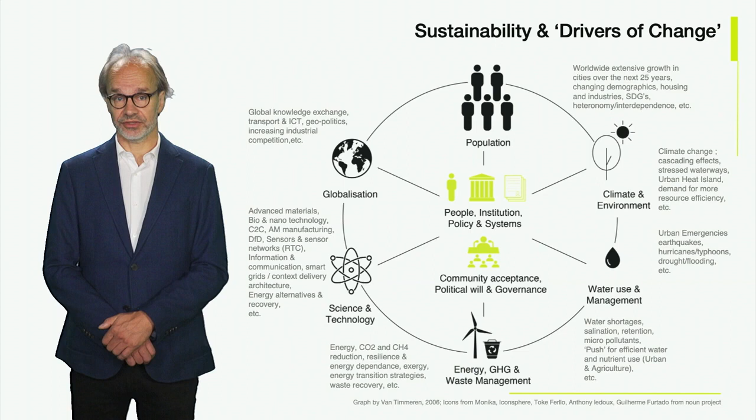There's a growing consensus that the world may be entering a period of scarcity, so it is more critical than ever to adopt a sustainable approach to development. In this complex setting of so many drivers of change, people, institutions, policies and systems are crucial starting points. An important step forward occurred in 2015 when the world embraced the 17 Sustainable Development Goals, or SDGs, which clarified that political will and community acceptance are essential for sustainable development.

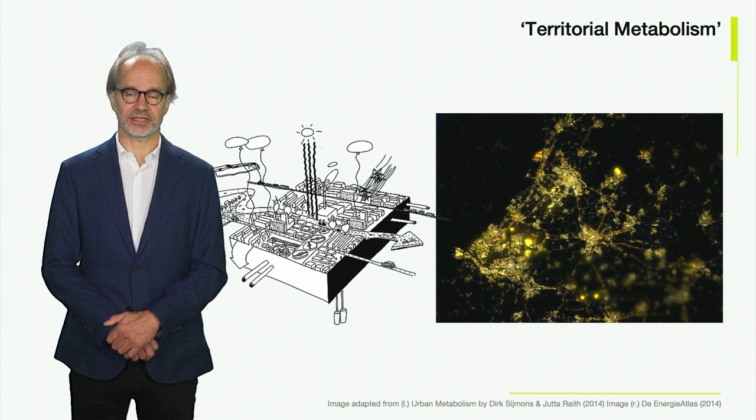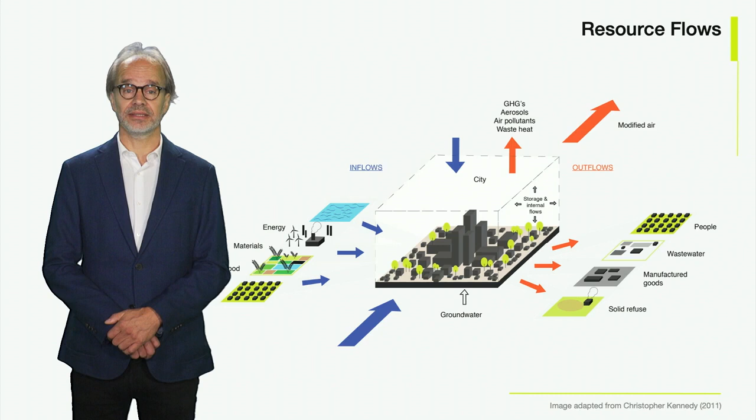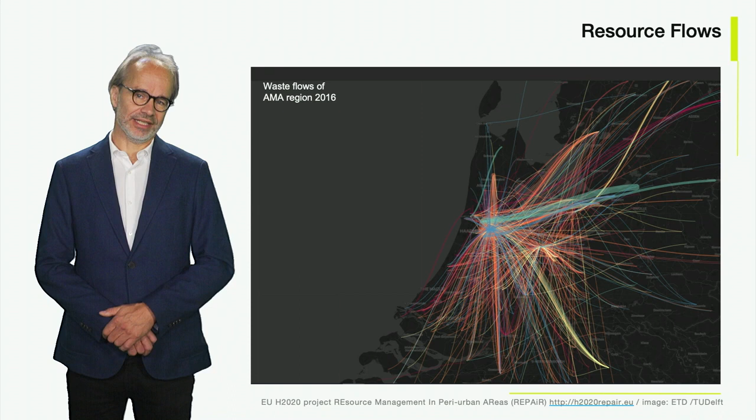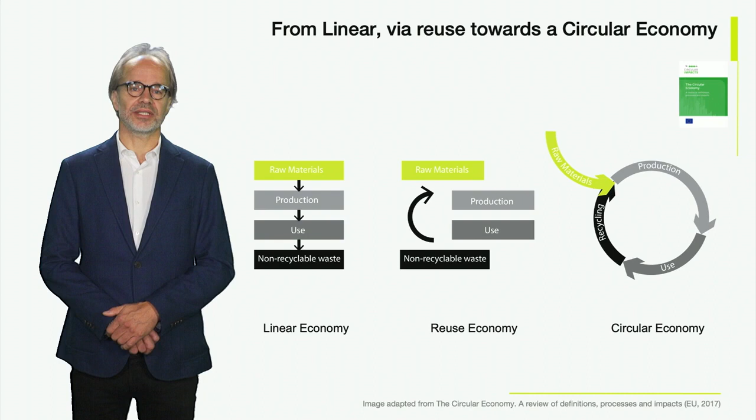One could actually use the analogy of the metabolism, a framework for modeling complex territorial systems, material and energy flows, as if the territory were an ecosystem. It helps us to study the dynamics of a territory in relation to scarcity, carrying capacity, and conservation of mass and energy. Now, as we have seen in the example of the Amsterdam metropolitan area shown before, our actual economy can be framed largely as linear. The prevalence of reuse within the economic models is increasing, but right now there is little that can truthfully be considered circular. So what distinguishes a linear economy from a circular one?

A linear economy converts natural resources into waste via production. Within this process, natural capital is removed from the environment, and by pollution or waste, the value of the natural resource is reduced. In a circular economy, however, there will be no loss of value, and the net effect on the environment will be zero or even positive. This is also called a regenerative overall effect.

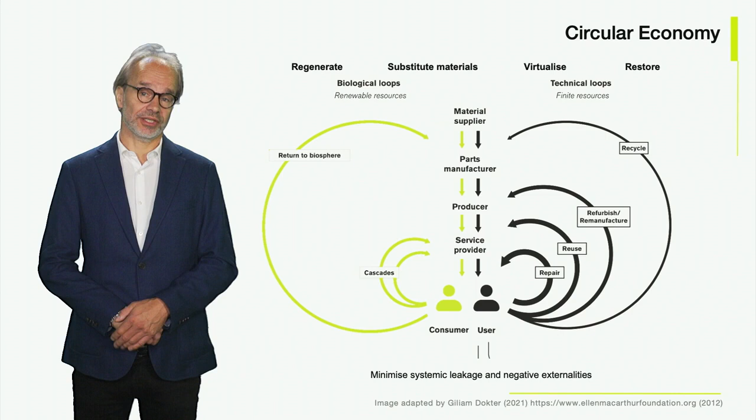In 2012, the Ellen MacArthur Foundation introduced the so-called butterfly scheme to explain a circular economy, with biological loops related to renewable resources and technical loops related to finite resources. The former achieves circularity through cascading, the latter through the so-called R-ladder approach. Concepts integral to the loops include regenerating or substituting materials, but also virtualizing material change and/or restoring all. This, of course, with the aim to minimize systemic leakage and negative externalities.

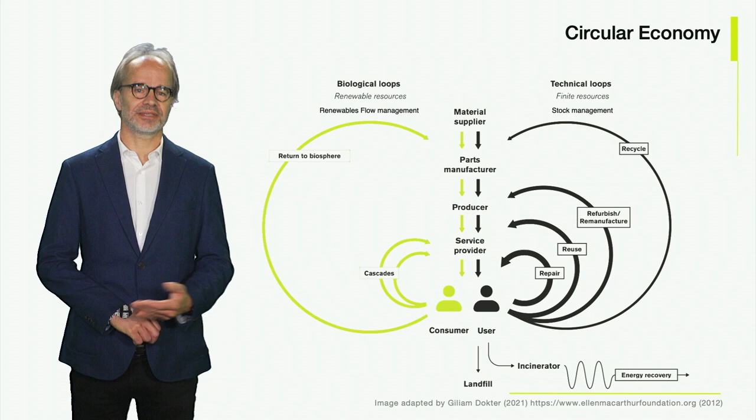Reality, unfortunately, teaches us that there's still landfill and waste that is incinerated, the so-called low-value recovery, in this case of energy. Overall, only about 9% of all global material resources at the moment are recycled annually. This is also referred to as the circularity gap.

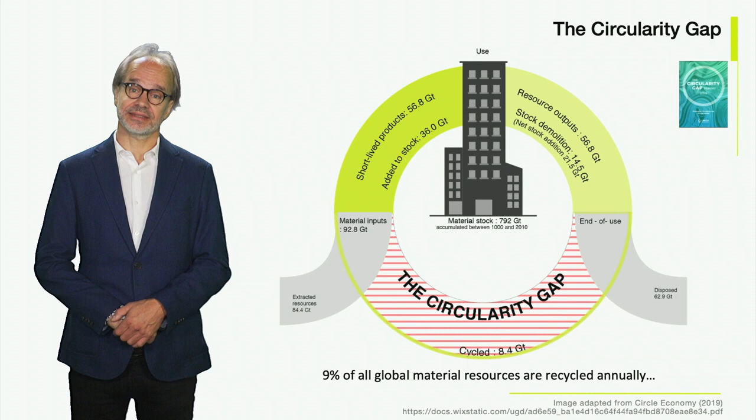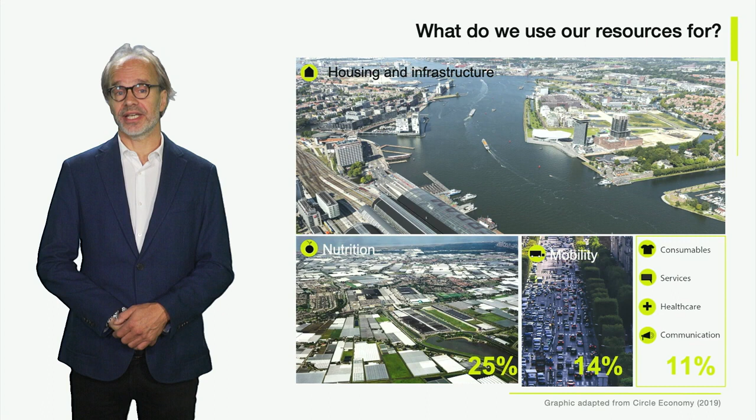In the previous example of the Amsterdam metropolitan area, the largest share of material resources and its use is associated with housing and infrastructure, followed by nutrition and mobility. This brings us to the need for systemic thinking and the inclusion of social equity.

For instance, look at these graphs. The first graph to the left shows environmental load related to energy resources, and the second includes materials in the scope, and a more nuanced image arises. Where we all thought the desired move from left to right in the left image tells a clear story, once adding special metals in the right, the overall assessment could be different. This is why circularity requires a systemic thinking approach.

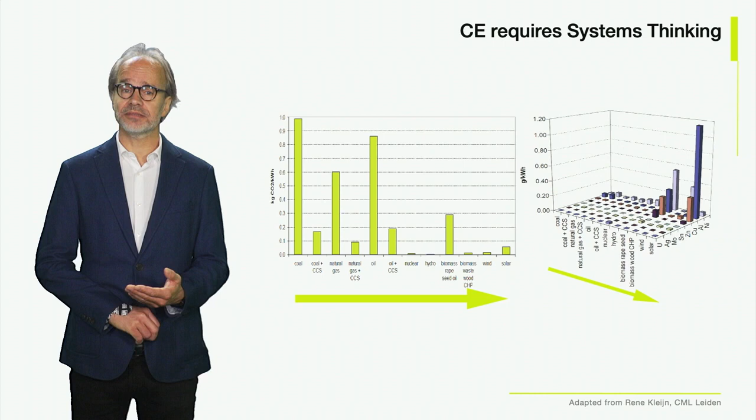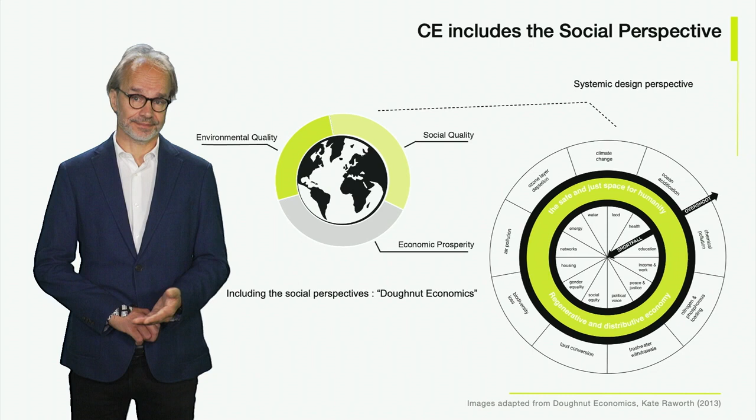And this means also the importance of including a social equity perspective, such as elaborated, for instance, in the concept of doughnut economics. If you apply this further to the field of spatial planning and development, it could be summarized as suggested by Metabolic as the 7 pillars of circularity.

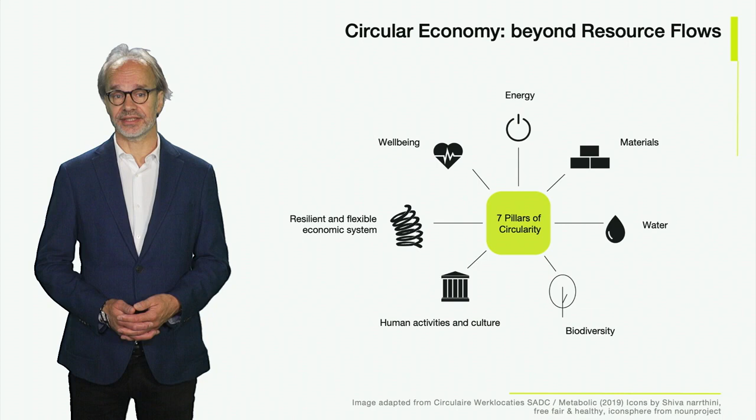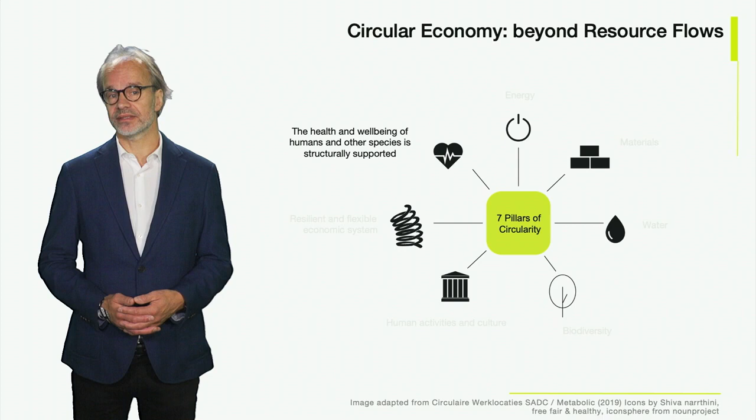Materials in the economy are cycled at continuous high value, water is extracted at a sustainable rate and resource recovery is maximized, biodiversity is structurally supported and enhanced, human society and culture are preserved, human activities generate value in measures beyond just financial, and the health and well-being of humans and other species is structurally supported. And all of this, of course, from the perspective of equity, resilience, and transparency.

This brings us to the final part of this video, related to circular strategies, value chains, and how the notion of multiscalarity and the regional scale is crucial.

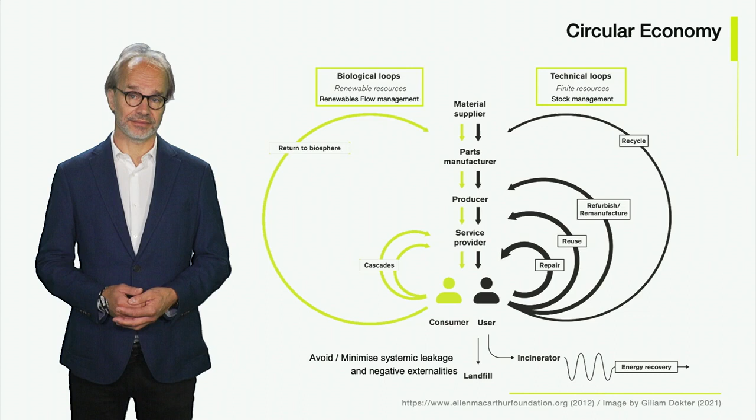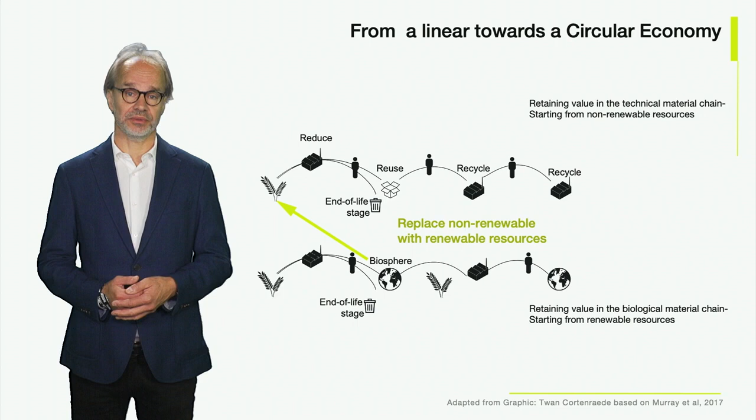Remember the 2 value chains in the circular economy butterfly scheme of the Ellen MacArthur Foundation? It comes down to either retaining value in the technical material chain, in the case of non-renewable resources, or in the case of renewable resources, retaining value in the biological material chain. However, the ultimate goal should always be to try replacing non-renewable with renewable resources, as shown in this overview of both value chains.

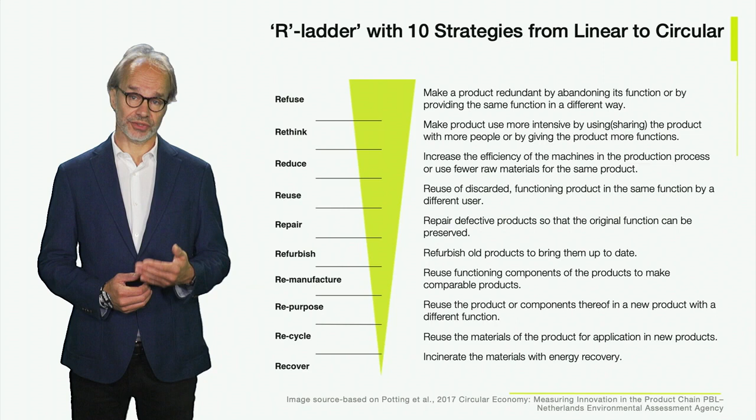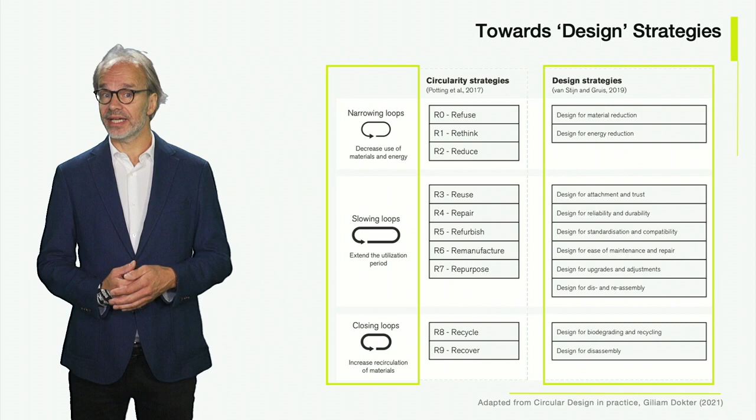The stepped approach to achieve an optimized cascading of these values is also known as the R ladder, with 10 circularity strategies from linear to circular. These 10 strategies can be clustered into 3 groups: narrowing loops, which decrease resource use; slowing loops, which extend product life; and closing loops, which recycle materials. And eventually they can be translated into 10 design strategies, focusing on resource reduction for narrowing loops, durability and standardization for slowing loops, and recycling in closing loops, as seen in this picture.

Which brings us to the importance of a regional approach within a multiscalar perspective. As we have seen, circular strategies require a systemic perspective. This is made even more critical by the fact that an increase of scale often results in increased complexity and interdisciplinarity, leading to solutions that cannot be found, considered, or assessed at a micro, meso, or macro scale in isolation. They are all interconnected.

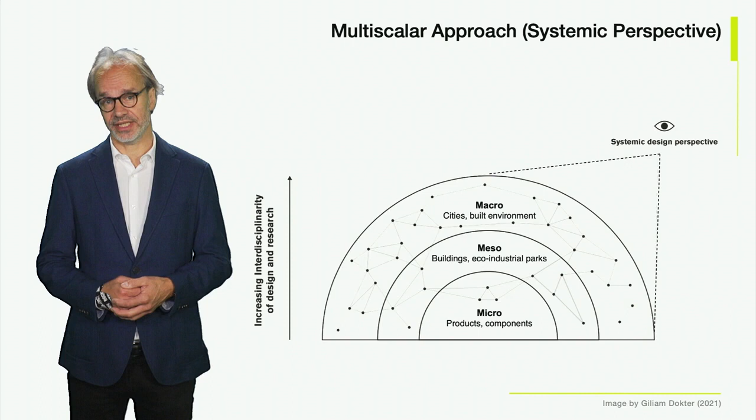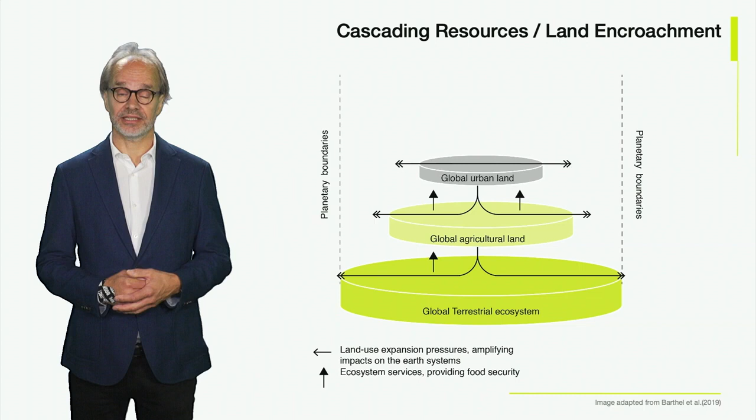To explain this, I use the example related to urbanization and agriculture. We can look at the effects of urbanization and the resources required to feed urbanized societies, which altogether result in cascading effects of land encroachment. In the end, this reaches the limits of our global terrestrial ecosystems, as defined by our planetary boundaries. This is also known as the unfair teleconnections impact on the Earth system, which makes it impossible to realize a circular society with regards to food.

To overcome this, it would be necessary to respond with global advisory planning policies which align with regional planning, preserve urban croplands, and maintain and restore soil quality through protecting and facilitating movements in regional, urban and peri-urban agriculture, with robust common property rights. These same regional policies could then further enable building circular economies and food security, and building it locally.

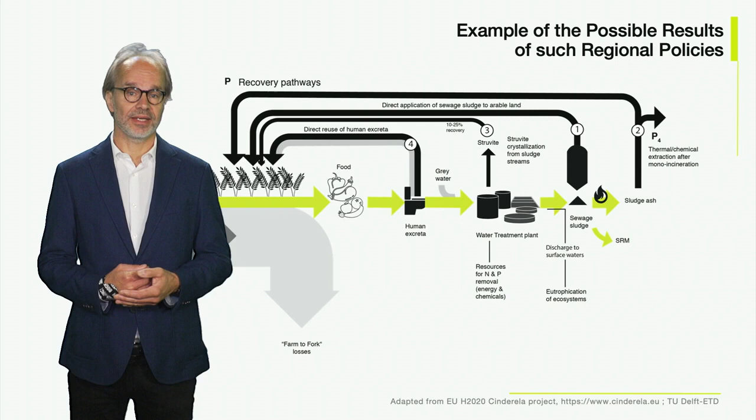In such an approach, within the example given, a multitude of recovery pathways, as shown here, achieve circularity. Acting on such leverage points to curb urban encroachment may simultaneously balance import dependencies and decrease national demands that drive unfair and environmentally destructive teleconnections. It highlights how crucial regional policies are in the aim to achieve an overall sustainable circularity, which can also support livability and equity, moving beyond that of just financial values.